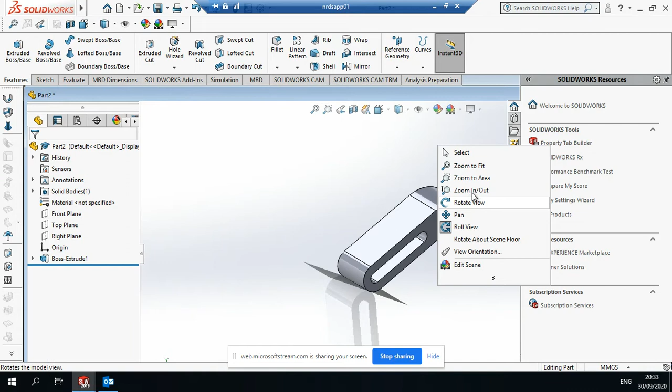Hey everyone, back again. Another quick SolidWorks tutorial, and we're going to look at this little part here today and how we make it. So it's using all features I hope we're sort of familiar with now and just need to practice a bit more. So it's looking at our 2D sketching, extruding, filleting, and another handy little feature called offset.

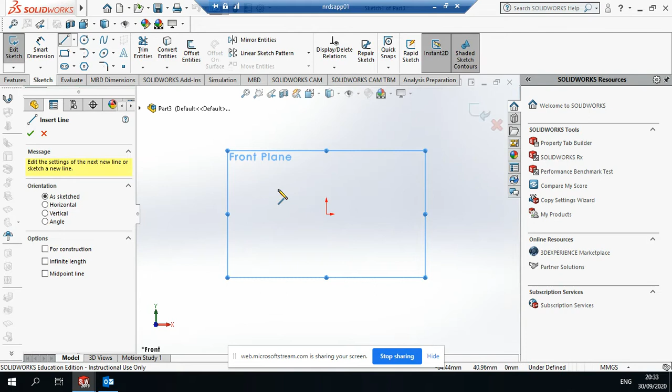So if you go into SolidWorks and create a new part, go to your front plane, go normal to, select sketch. From your origin, draw a line out and draw a line at any angle. Then select fillet, select this point and enter 25 millimeters, 25, select OK.

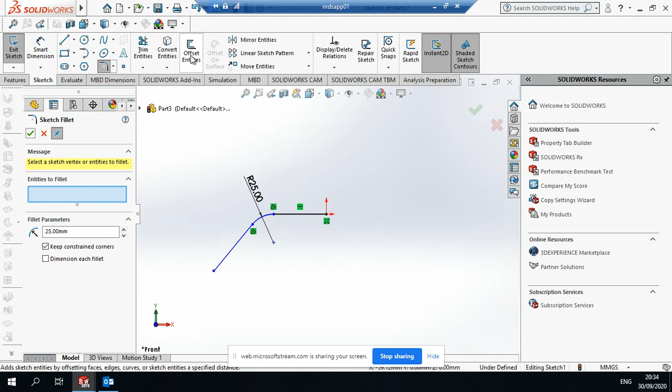If you come up here to your sketch ribbon and select offset and drag over everything, offset copies everything and creates another line. So if we offset by 20, select OK.

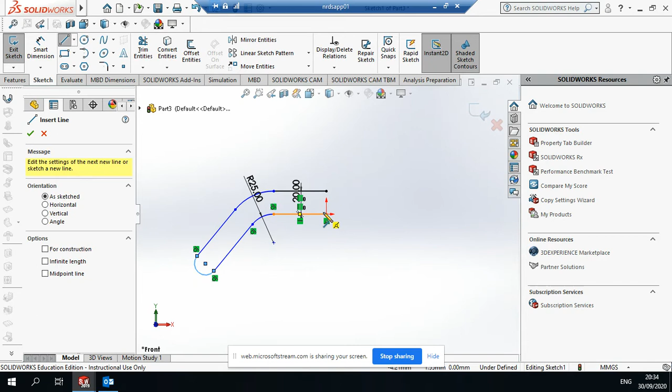Then we want to come up here to our circle. Below circle we have tangent arc. We'll put a tangent arc between both of these points. Then we want to close our sketch up here. So now we've got as far as this.

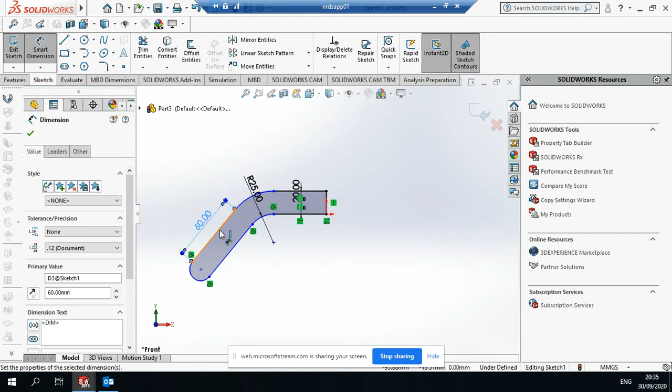We're going to dimension what we have and what we do. So if we select this line and come perpendicular out and change it to 60 millimeters. And if we select this line and this line and update this angle to be 140 degrees, we'll see our part move. Okay.

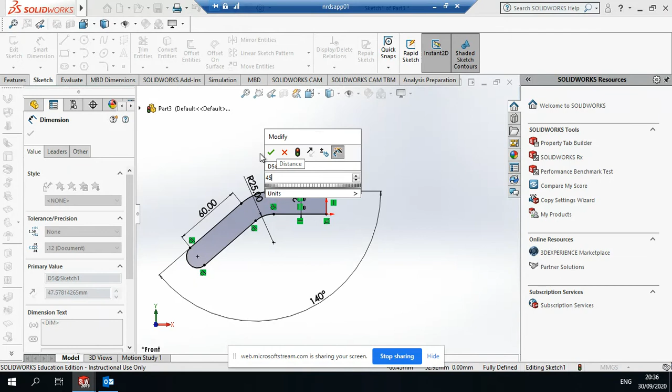And then the only little part we have left to dimension are these black lines. So if we select it and put this black line to be 45 millimeters, we select OK. And we can see now our part's fully defined. So if we handed that over to a technician in a workshop, he or she would be able to draw it for us.

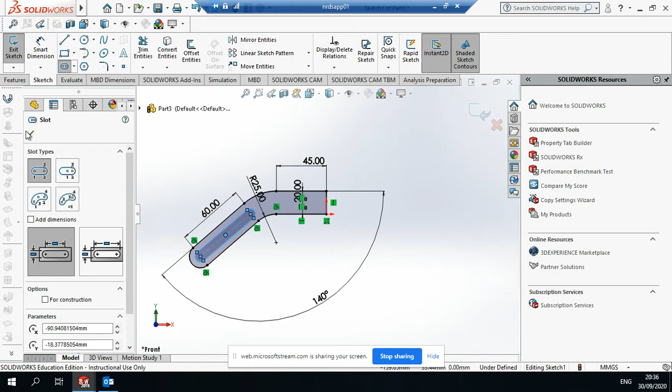Next thing we want to do is select a straight slot from that midpoint, drag it up, okay, and just draw your slot. This would get a little tricky if these lines weren't parallel.

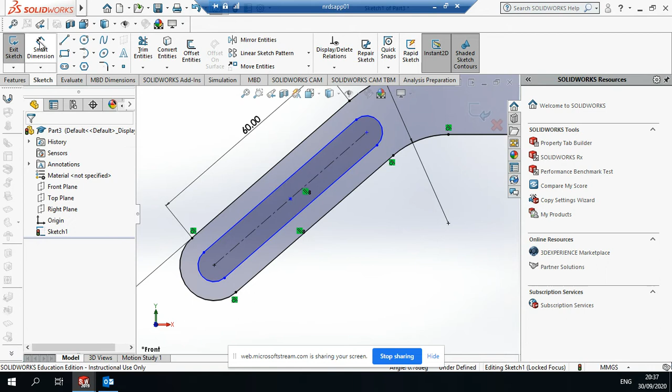So if we zoom in here, if you click that center line, hold Control on your keyboard and select this center line. If you come over here and select parallel, see the way that's moved slightly? So it means that slot is now sitting perfectly on the center line. So it's equidistant here and equidistant here. So now select it. We're going to make that slot 43 millimeters. Select your tick.

And the only other thing we need to do is say how big that slot's going to be. Sorry, spun my mouse wheel too quickly. Select our center line out to that edge, and for that we're going to put in 3.5. And again, we're fully defined here, so we've included all the dimensions needed to redraw that part or recreate it.

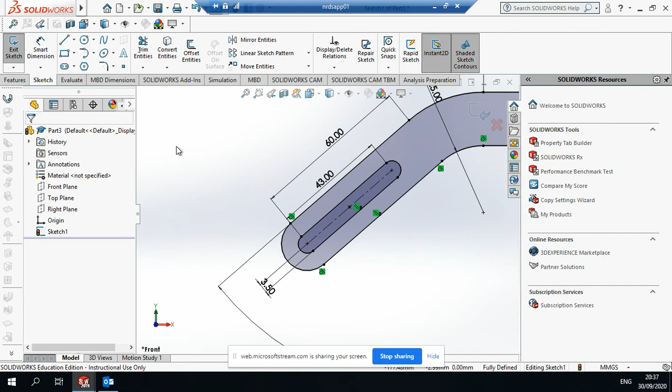So now, double tap your spacebar, go to your front plane here. If you hang over them, it'll tell you which plane we're on. Hang over front, select it, and zoom in slightly. So that looks to be the right shape.

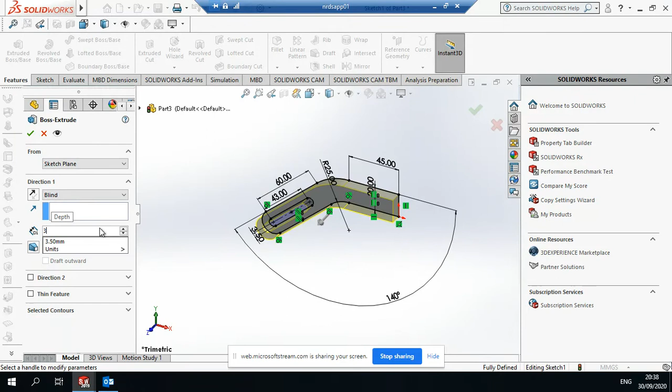If we select features, extrude boss base, and we want to make it 3.5 millimeters in thickness, select there. And again, we can change the direction of that boss or base if we select these arrows. For this one, we'll have it going that way. Select your tick, and we're done.

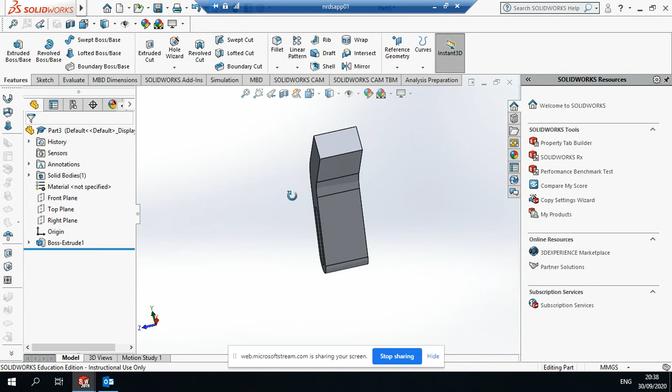So hopefully that was a simple enough little part. People are starting to get their SolidWorks skills more and more up to speed, and we're ready to start getting on to more and more difficult parts.